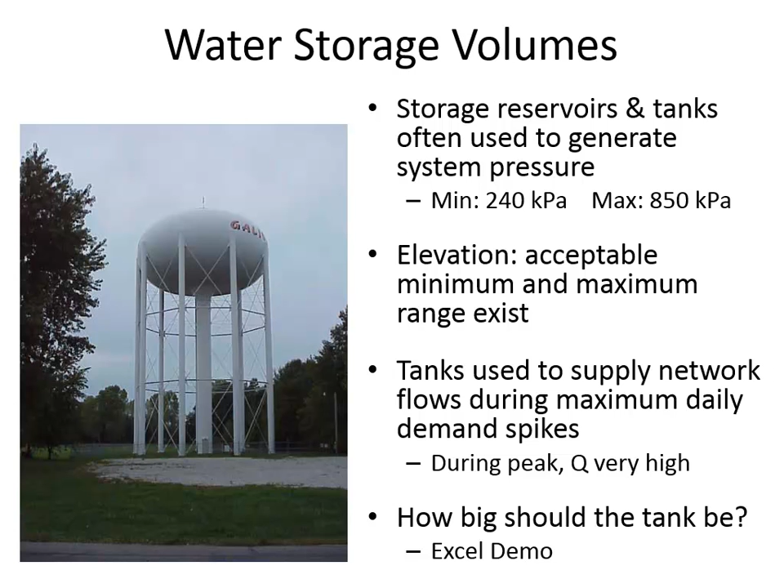Let's talk about water storage volumes. You already have hopefully designed your system so that at maximum flow you don't see anywhere in the network more than 850 kilopascals, and actually you'd see that at no flow is when you see the max pressure, and you see the minimum pressure at the peak flow. That's the range that you're supposed to be within. The water storage tank partly exists to provide pressure for your network, but it's also used to provide water when the city is consuming more than can be produced by the artesian well that exists up on the hillside.

And here's what we know about the water demand in the city. Here's my digitization of that top curve, and you submitted a similar thing for one of your homework assignments where, on an hour-by-hour basis, you stated what percent of the peak that was.

You can see that here at 7 o'clock, 8 o'clock, that's the peak, so it's 100% of the peak at 7 o'clock. And then at midnight, since it's 100 divided by about 270, that is 36% of the peak. So this is a ratio at any hour of the day of the flow rate demand versus the peak demand. The highest point of that curve is the design flow you identified in your demand estimation.

The blue line pictured there illustrates the average flow rate coming into the tank. We're going to have a water storage reservoir where the inflow to the reservoir is constant and the outflow varies. So what happens to a tank when the inflow is constant and the outflow varies? Well, there's going to be a point where after a long day, that tank is almost completely empty.

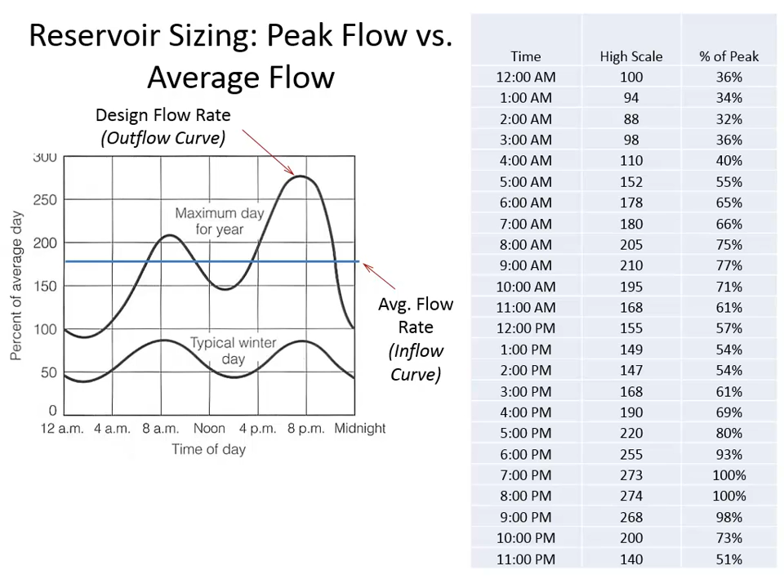That's the blue line there. And then the peak flow rate, when the greatest demand is actually happening, is 400 liters per second.

The procedure I'm going to follow—remember that this is recorded, so you can come back to the Excel manipulations I'm about to do and do it yourself for your own flow rates.

We're going to look at this digitization that's available and try to find out when the Q in is greater than the Q out. And we're going to have to reorganize that list so that the Q in greater than Q out rows are at the top of the list.

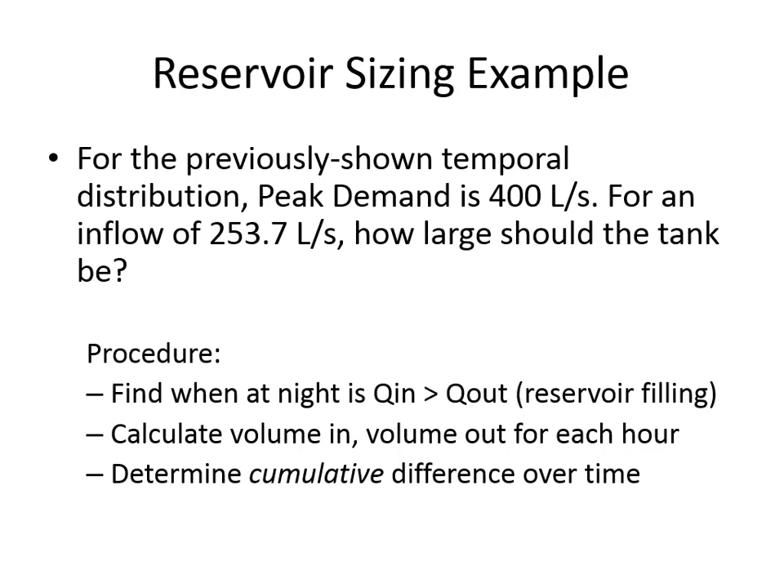Then for each hour, we're going to find out how much water came in, how much water came out, and the difference between the two is either how much water accumulated in the hour or how much water left the reservoir in the hour. The point where there was the biggest cumulative difference between the two tells us the amount of water that needs to be stored by the reservoir.

So I'm going to start up Excel, and hopefully you've saved your spreadsheet where you put together the curve—hopefully you've still got your assignment where you did this one. I'm just going to copy and paste that and put it into Excel. And you've got the same thing.

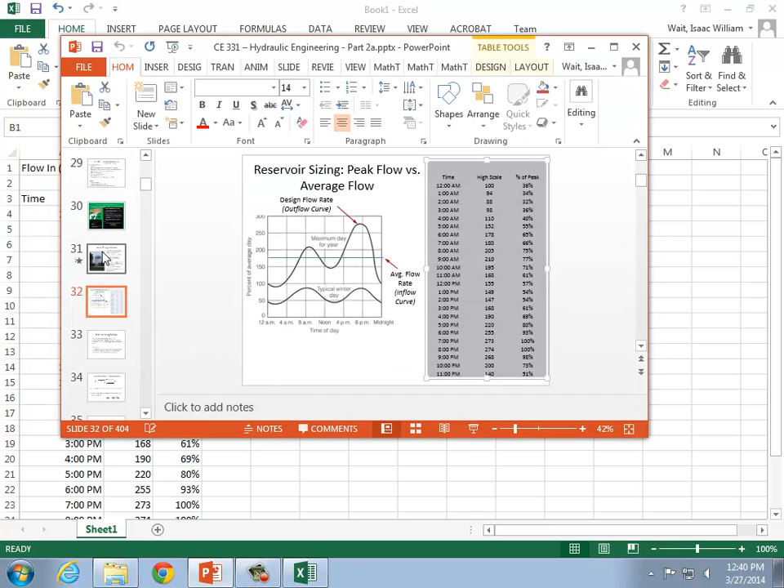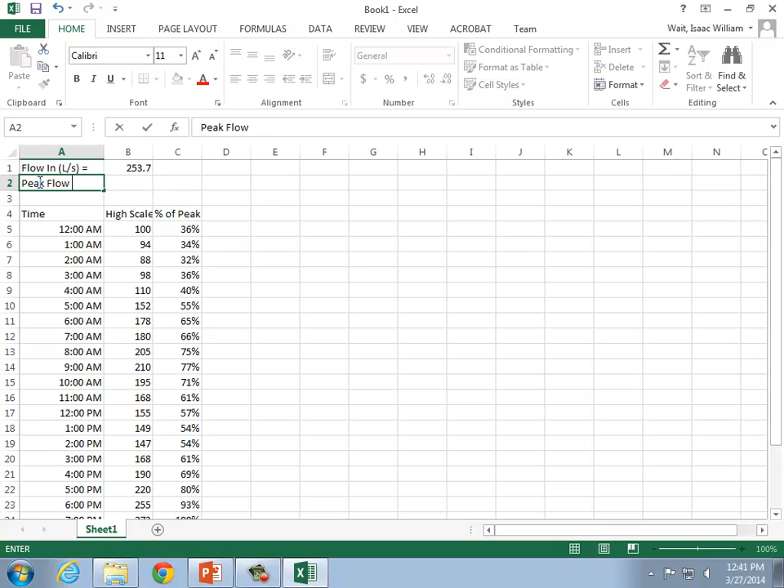All right, so in this case, I'm going to find the flow in. The flow in from the spring is 253.7. And then the flow out, the peak flow out, is 400 liters per second.

And so I can say for each hour what is the flow in, the flow out, and they're just based on the flow in, of course, is constant, so it will just be anchored up to that location. And then the flow out is going to be this anchored, nope, wrong one.

It is the 400 liters per second anchored multiplied by the percent of peak. And so at 12 o'clock, I've got 144 liters per second because it's only 36% of the peak flow rate. Double click to bring that down.

So in the evening, you go to the evening hours and you find out when, for the first time, is the flow out less than the flow in. In other words, when is the reservoir going to start filling up after having been draining all day? And so here you can see at 11 o'clock is the first hour where the flow out is less than the flow in.

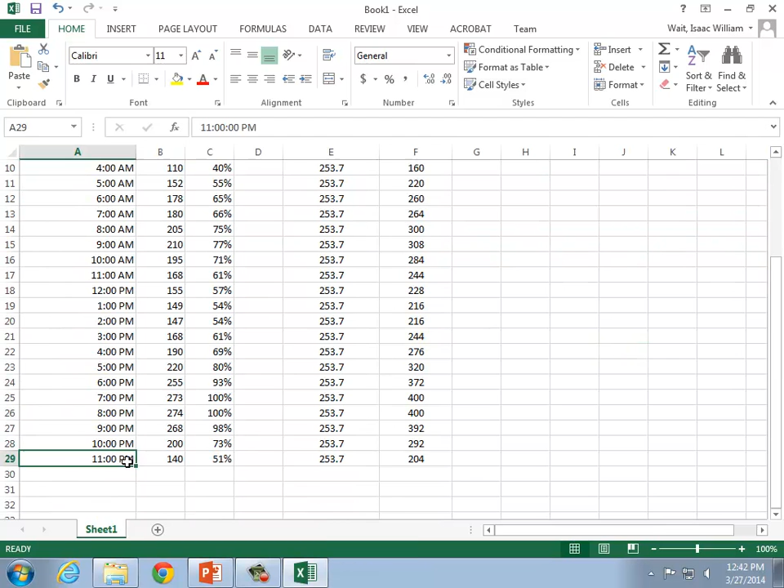And so what I need to do is add a line, and move from the 11 o'clock row up to the top, so that I'm starting with an empty reservoir. Then I assume that at 10 o'clock and 59 minutes the reservoir is virtually empty, but then at 11 o'clock all of a sudden the flow in is greater than the flow out. So now I want to have the volume in terms of liters and the volume out.

Actually, it may be more convenient if I find it in terms of cubic meters. So the volume in is going to be the flow rate in divided by 1,000 to convert between liters and cubic meters. And then I have to multiply by how many seconds there are in an hour, because we're saying for the entire 11 o'clock hour, there's 3,600 seconds. Assume that you've got that flow rate coming in over that entire 3,600 seconds. So I've got 913 cubic meters of water that came in.

And I can do the same thing to find out how much water came out. I'm just going to have the flow rate out divided by 1,000 and then times 3,600 seconds. That tells me how many cubic meters went out of the system during the time increment in question. I can just double click and it'll apply those calculations all the way through.

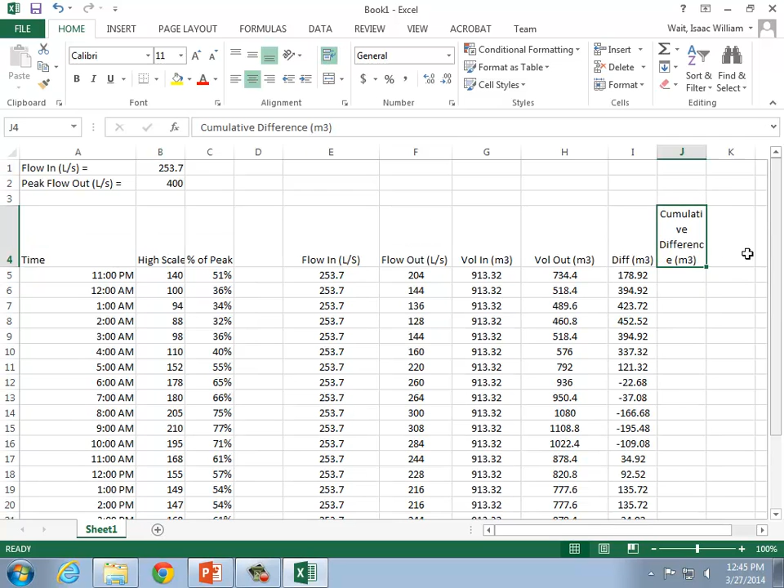Cumulative difference - what that is, we're trying to keep track of: in the first hour it's just how much was there, but then in the next hour it is how much was in the previous hour plus the difference from the hour that we're in. For example, at the end of 11 o'clock, I had 179 cubic meters. Then I had another 395 cubic meters, so I add those two together, and at the end of 12 o'clock hour, I've got 574.

And so that process continues, and you can see that it sometimes goes up, sometimes it goes down. There appears to be an error here. What's the average of the flow out? 256.3.

It must just be the round off that I'm doing here. Yeah, that's exactly what it is.

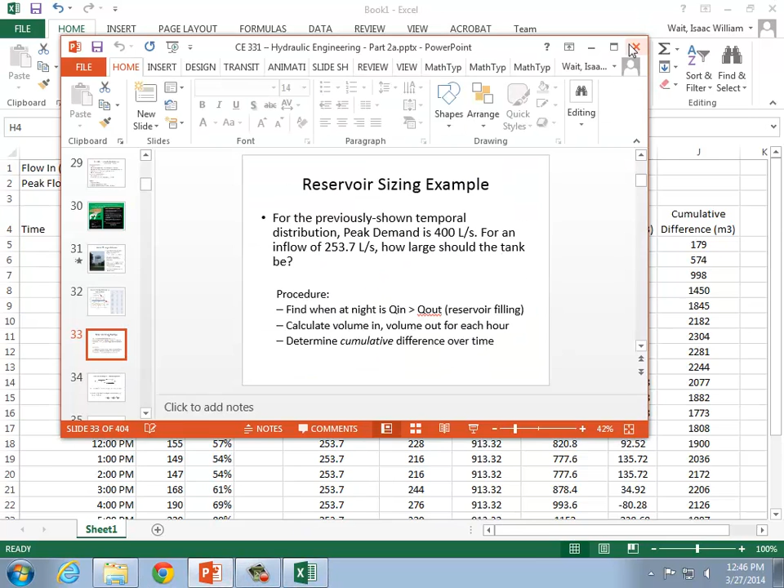When I copied the table from here to Excel, I lost my third digit of precision for the percent of peak. You won't have this problem when you're working on yours, but the way that you know it has converged to the correct answer is when it goes to 0 at the end.

Let me just make sure what's going on here. You'll notice that the volume is going down, and then it increases again. So the size of the tank that's required is the largest of the cumulative differences throughout the day. If we find the max of that, we'll know how big the tank needs to be. So there's a formula, equals max, and you can put it in here, and it shows 2304 is the largest of these differences through the day.

I did Shift, Control, and the down arrow, and it goes to the bottom of the list.

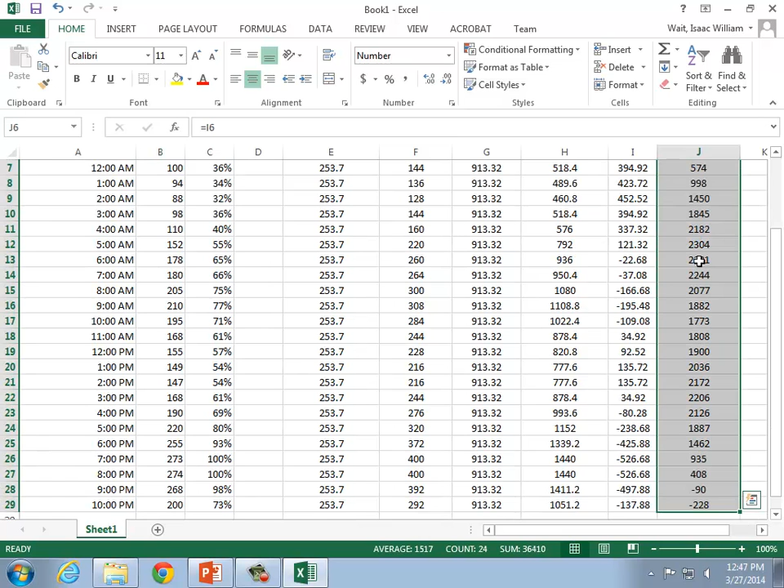So that's the process of finding the reservoir volume that's required. You go through and find the volume that came in and the volume that went out, the difference between the two, so you know how much net during the 1 hour period came in versus went out, and then you find the cumulative difference over the entire course of the day. Any other questions about that?

Do you have any kind of factor? Yeah, sometimes it's common to add, in this case, a 25% safety factor, so the size you design for would maybe be 1.25 times what you found, 2880. Then what you'd look at is the diameter of the tank you're going to use and how tall the tank would have to be in order to give you the design volume you come up with.

Any other questions on sizing the reservoir? All right.

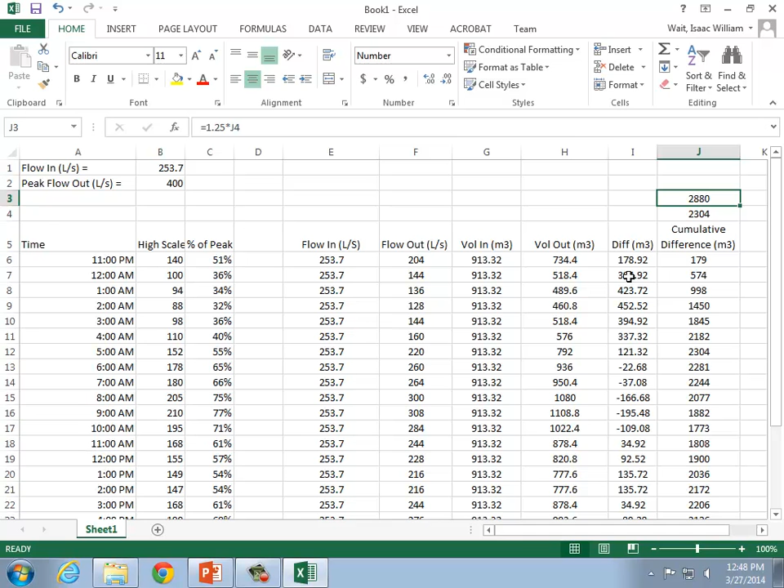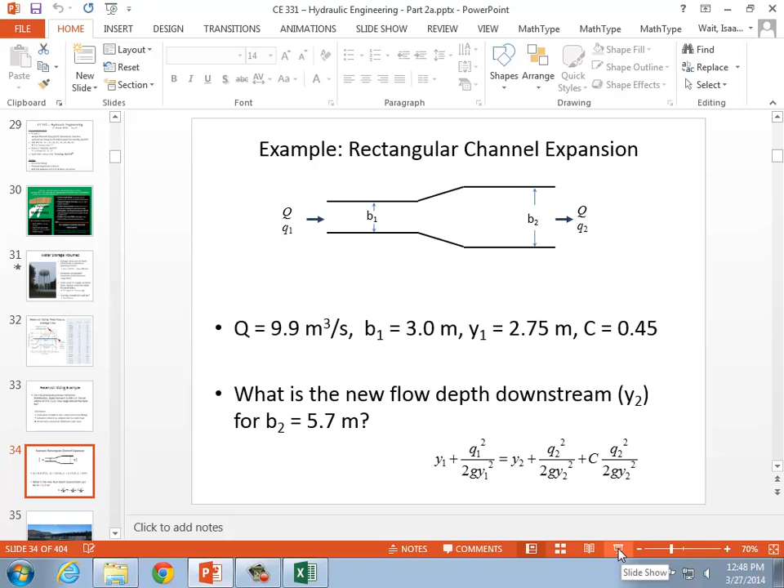Where we left off was talking about channel expansions, and we're going to take a look at an example where we want to find the new flow depth downstream, where we are going to factor in a C value that accounts for the energy loss due to the expansion.

This is somewhat akin to accounting for local losses, because there's turbulence induced by the channel transition. So we're going to find what would be the new flow depth downstream when the channel goes from being 3 meters wide originally to 5.7 meters wide after the transition.

We're given in this problem that the flow rate was 9.9 cubic meters per second. We can find the flow per unit width at 1 by using the 9.9 cubic meters per second and the channel width of 3 meters, and that gives us 3.3 meters squared per second.

From that, calculate the critical depth, because this is a rectangular channel. It's the flow per unit width squared divided by G, to the 1/3 power. So we've got 3.3 meters squared per second, square that, divided by 9.81 meters per second squared. That's 1.035 meters. The depth at 1 is already known to be 2.75 meters, and so y1 is greater than yc.

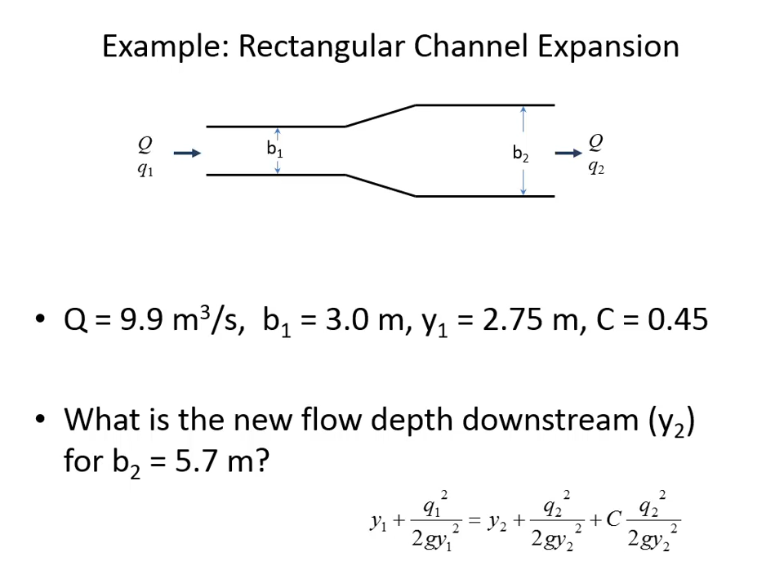The Pacific Northwest has some of the most inexpensive electricity in the entire United States, whereas we pay about 11 cents per kilowatt hour for coal-based electric power in West Virginia and most of this region. They're usually paying around 5 or 6 cents per kilowatt hour for hydropower.

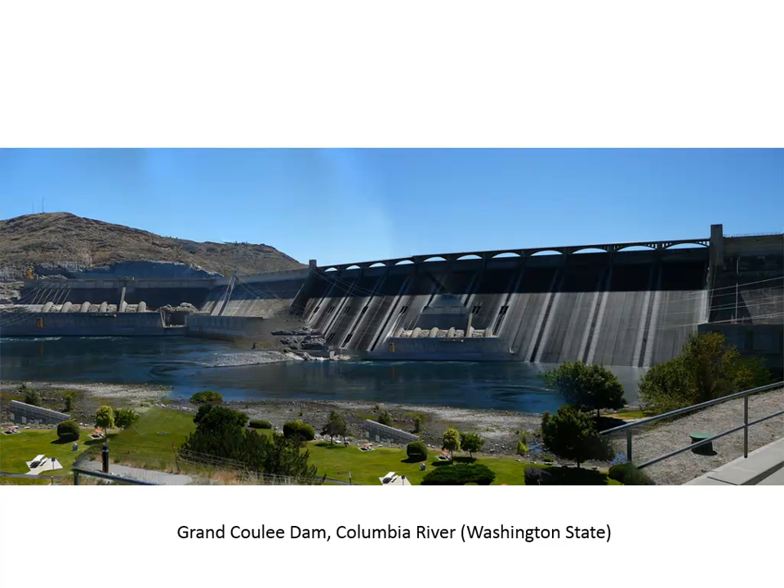They're fortunate to have a big river with a nice tall head drop so they could generate a lot of electricity. You can see that when the water goes over the spillway, there's a really steep drop along the spillway face, and we've talked about this as being a location that induces a hydraulic jump. Out in nature, water coming off the top of a spillway accumulates so much velocity that it then has to dissipate all of that energy when it gets to the bottom.

What we're going to be looking at today is trying to figure out the height of the spillway required and the relationship between the water level above the spillway and the flow rate. As you can see from this diagram, the water actually sort of pools over a spillway crest. And because of the curvature of the spillway crest, you can...

express a curved spillway as though it was a sharp-crested spillway, a sharp-crested weir. The dark shaded lines here represent hypothetically the performance of the flow over a sharp-crested weir that's equivalent to the actual spillway that's there.

Just as a general rule of thumb, there's a relationship between the H, which would be the water height above this theoretical sharp crest, and H sub D, which is the actual physical elevation of the water above the spillway crest. And there are equations that relate, in general, the flow rate of the water over the spillway, both in terms of it being an actual curved spillway shape, based on H sub D, or the hypothetical idea of it being a sharp-crested spillway.

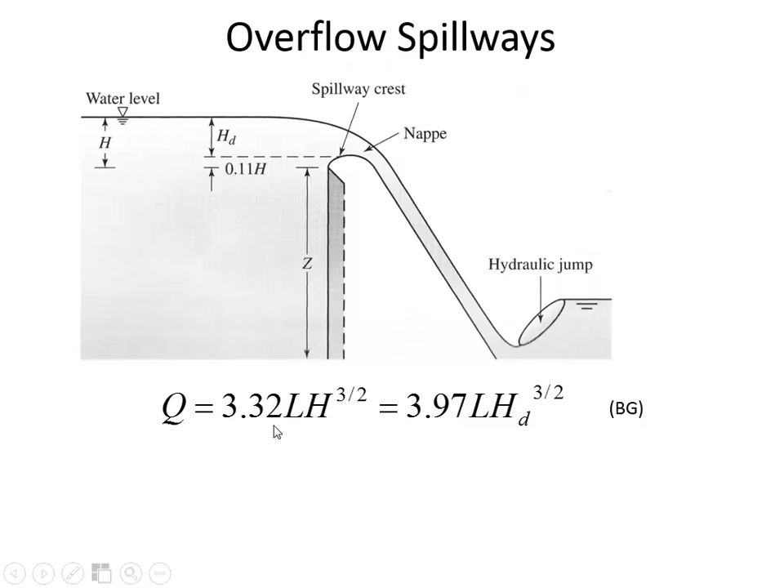We've got a flow rate Q of 38,000 cubic feet per second, a spillway length of 300 feet, and that parameter is into the page. If you're looking at the spillway, the L is this length.

It's the dimension that is into the drawing as we look at it here. And we want to know what elevation the spillway crest should be built.

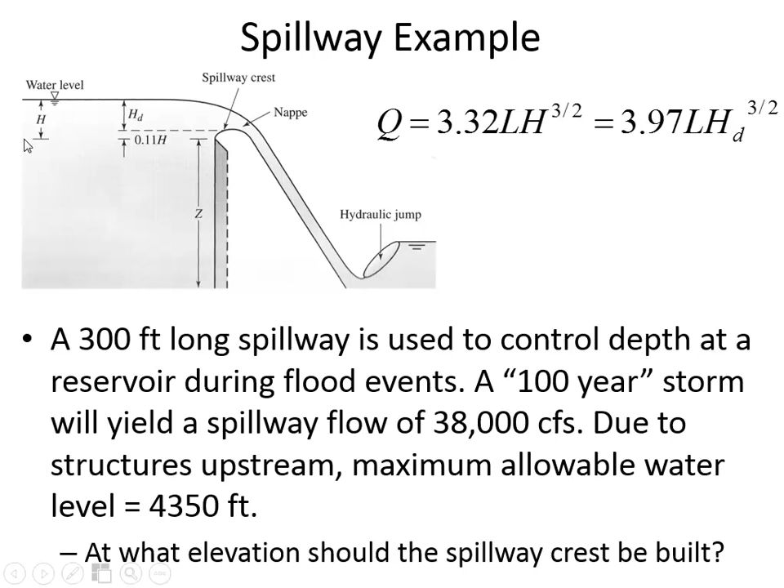A broad-crested weir is something we're going to look at in the lab today. A broad-crested weir works by inducing critical flow over the weir.

Its functionality is to quantify flow rate. The whole point of a broad-crested weir is that if you measure the critical depth over the weir, you can use this equation to find the flow rate. It's a flow measurement technique.

It's kind of easy to measure flow rate with a pipe, for example. They have magnetic flow meters, like a collar that goes around a pipe, measuring the magnetic signature of the mass going by, so you can quantify flow rate with a magnetic device for an enclosed pipe. But you can't use that same approach for a channel, because it's open to the air and the channel width changes.

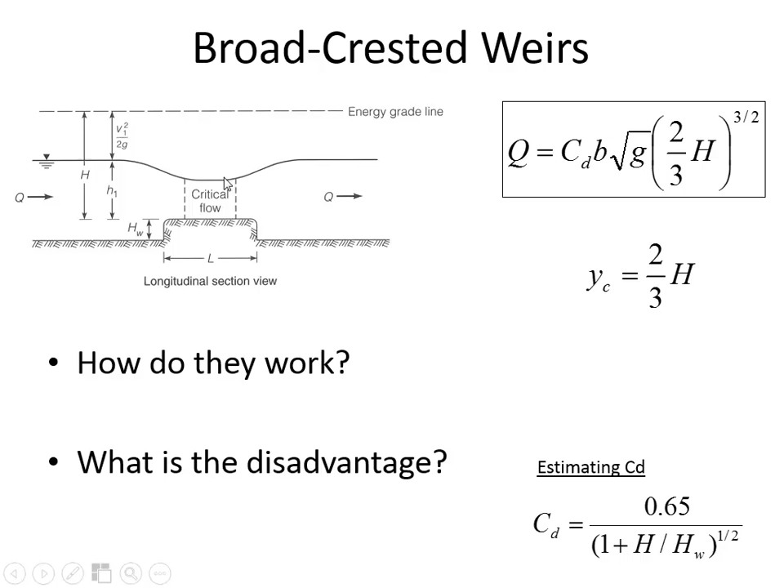By contrast, a sharp-crested weir—the difference is the broad crest is a really long section that you can measure critical flow over. The sharp-crested weir comes to a point, and it causes water to flow over the sharp-crested weir.

If we apply the energy equation at location 1 and location 2, here you can see we're setting the energy equal to each other for now, neglecting the energy losses between the two. We say that at location 2, that's our elevation datum, so allow the elevation at 2 to be equal to 0 in that energy expression.

Then you can rearrange the energy equation to solve for the velocity at 2. This is somewhat similar to the orifice equation when we said there was water coming out of a small hole on the side of a tank, in the way we're using the elevation difference and the velocity at 1 to tell us what the velocity at 2 should be.

We define the total head, the elevation of the water above the sharp-crested weir—that's h. And so we can also find the velocity at 2 as the square root of 2gh.

Oftentimes the velocity head is so small relative to the total energy at 1 that we just actually use the water depth. So here you can see that h is measuring all the way from this datum to the total energy line. It looks like there's a pretty good gap here between the water surface and the energy line.

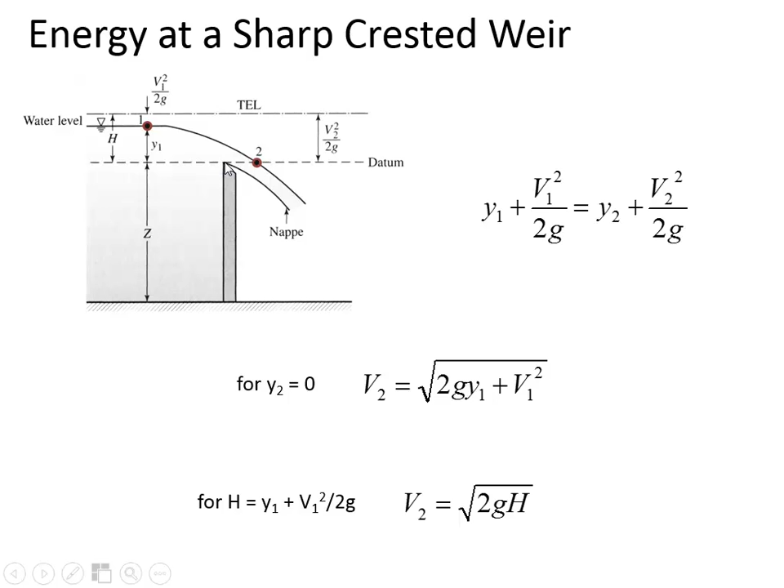This shows the development of the sharp-crested weir equation. If you integrate the incremental elements of increasing water height of the water flowing over the edge—if you slice it up into very small vertical elements and integrate over the entire water depth from the edge up to the surface—then you ultimately get the flow rate.

The flow rate is the discharge coefficient—the C sub D again accounts for energy losses—times 2/3 times the square root of 2g, both 2 and g in the square root, L is not, and then h to the 3/2 power, where h is the water elevation plus the velocity head.

Likewise, just as it was with the broad-crested weir, this estimate for the discharge coefficient is just kind of an empirical observation that isn't always true, and it won't really even be close for the measurements we do today.

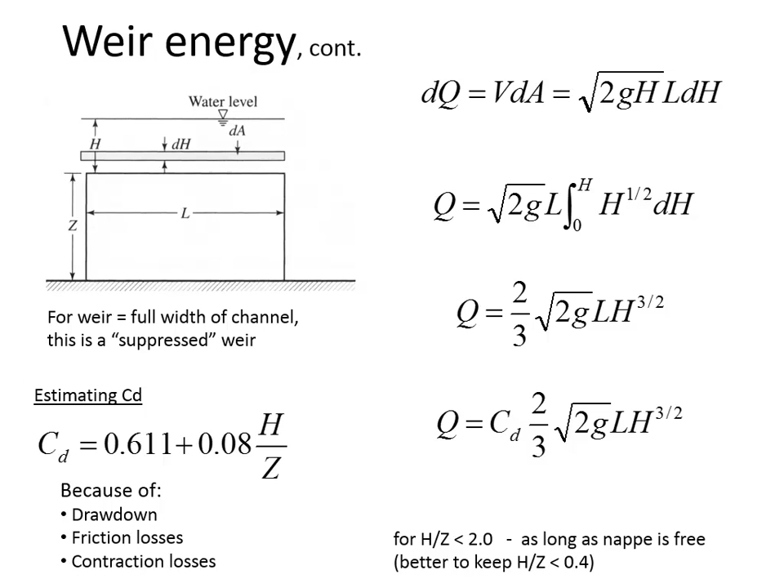I'm going to ask you to find the discharge coefficient for the sharp-crested weir that we have in the lab, and this equation won't be a good predictor because our sharp-crested weir is very narrow. We're working with pretty small quantities of water, and this equation is maybe more effective for full-scale sharp-crested weirs used in irrigation and farming out in the real world.

A typical C sub D would be 0.62, and if you combine that with the constant square root of 2g, so C sub D, the 2/3, and the square root of 2g, that's sometimes combined all together as a single C value. You can see that for both SI and BG units, all three of those terms are combined, and there's a typical C value that you'd maybe be given.

For back-of-the-envelope type calculations where you're just trying to find broadly what the flow rate might be if you're measuring the height of the water surface, this would be a good place to start.

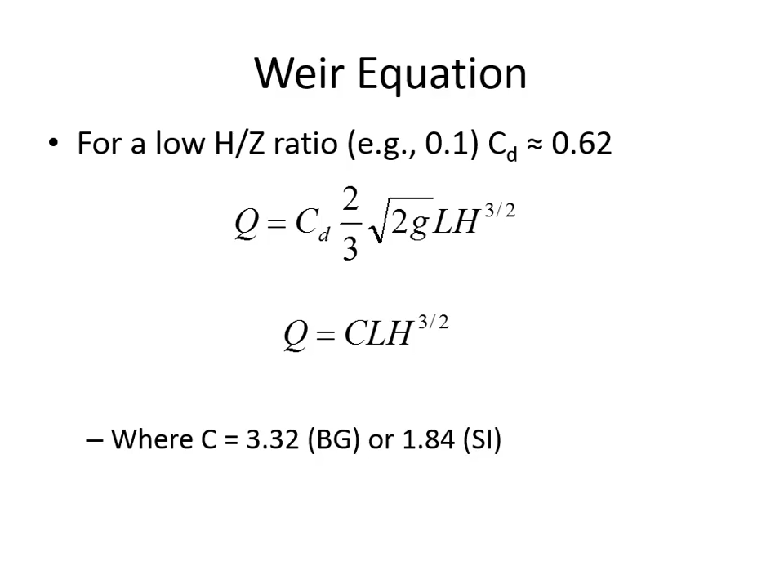The weir that we've got, the sharp-crested weir, is a contracted rectangular weir. Sometimes these are called unsuppressed if contracted. What it means is that the water is only flowing over the edge part of the channel width, not the entire channel width. You can see there are some edge panels here that make it so the weir length L is different from the channel width B.

That's what we've got in the lab. The water flowing along the bench has a certain little trough that's fairly wide, has a big B, but the weir we're going to be using is only maybe 2 inches in length. L is going to be very small.

So what you have to do when using the Weir equation, where we previously had L, you have to substitute in L prime if it's a contracted weir. That's the equation explained in the handout I'm going to give you now.

This demo that we're going to do today requires calculations that'll probably take you between 5 and 7 minutes to complete, and you'll submit it with your next homework assignment.